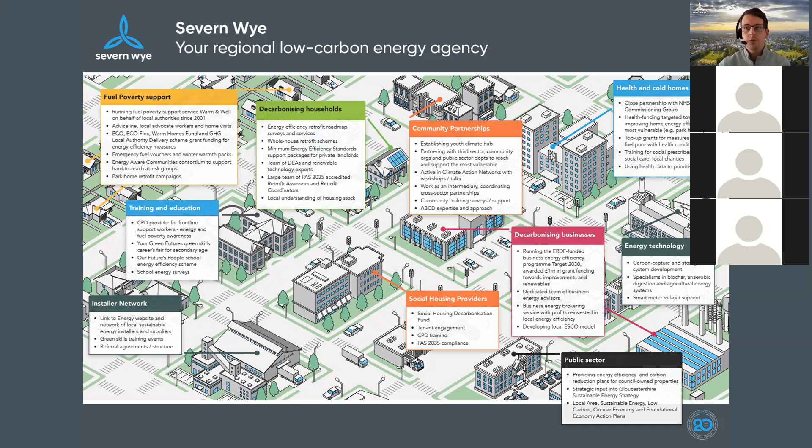Severn Wye as a charity provides support in quite a few different ways. Our main area is fuel poverty support, so that's helping people on low income or who receive benefits. We also do training and education, and we've got our own installer network for people looking for installers to do work. A lot of work on decarbonising households, community partnerships especially in Wales, and we've got a target for 2020-2030 decarbonising businesses as well. We also work with social housing providers on schemes to help with heating and insulation, and a lot of our focus is on making homes warmer for everyone.

That's what our Warm and Well advice line is for, which is a project within Severn Wye itself. It's funded by the local authorities in Gloucestershire, as well as Gloucestershire's Clinical Commissioning Group, to provide energy efficiency advice to residents in the area.

So what I'll be covering is why buildings matter on the journey to carbon neutral, a brief introduction to retrofit and how that works for a property, a little bit on low carbon heating and renewables, three case studies for yourselves, and we'll let you know about how you can fund improvements as well as other services we've got to offer.

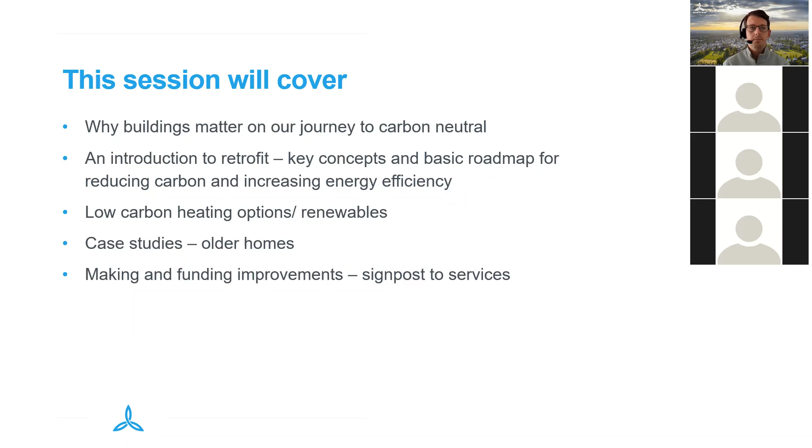So this is a little quote from the Committee on Climate Change: we cannot meet our climate objectives without a major improvement in UK housing. You might have seen in the news over the past month or so, they looked at flats in the London area, and you might have seen images on TV of mold on the ceilings, water dripping through, that sort of thing. So it's basically improving those properties and making them future proof, because the majority of housing stock is what we'll be living in over the next 50 years or so. It's already been built.

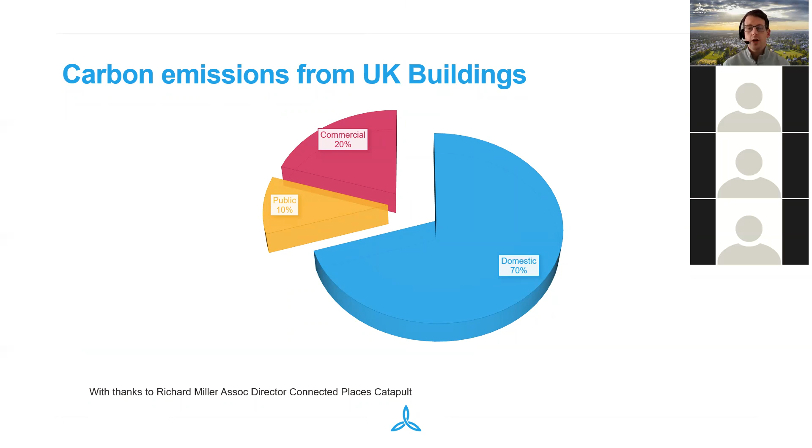Carbon emissions from UK buildings - you can see nearly three-quarters of that is made up of what we call domestic dwellings, with the other 30% from public and commercial, public being things like your libraries and that sort of building. So you can see the importance of why we need to get those carbon emissions down in domestic properties.

Actually, the actual energy use within a property, up to 69%, goes towards heating and hot water, which is why we focus on that area above anything else. And we use Warm and Well as well as government grants to focus on reducing the heat loss of a property to then improve its thermal comfort.

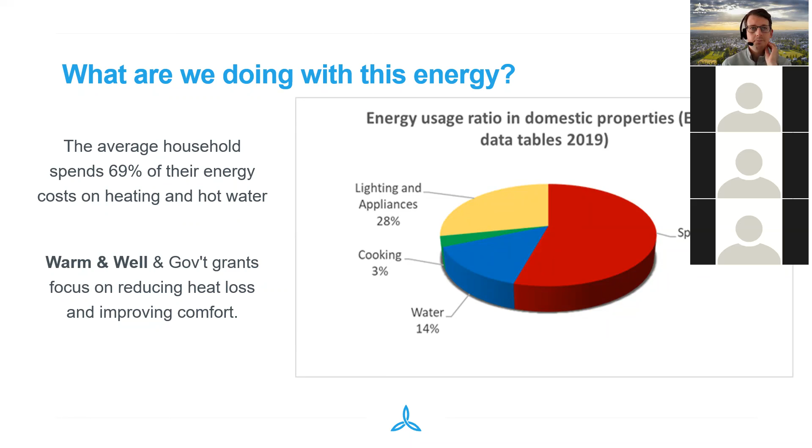There are obviously challenges to this. So you think of your heating source - a lot of rural properties use either LPG or oil to heat their properties, and that's obviously very carbon intensive, a lot of emissions from that. You've got solid walls, whether that's brick or stone, which can be quite difficult to retrofit with insulation at times, but not impossible. Properties with lots of windows, or what we call cold bridging.

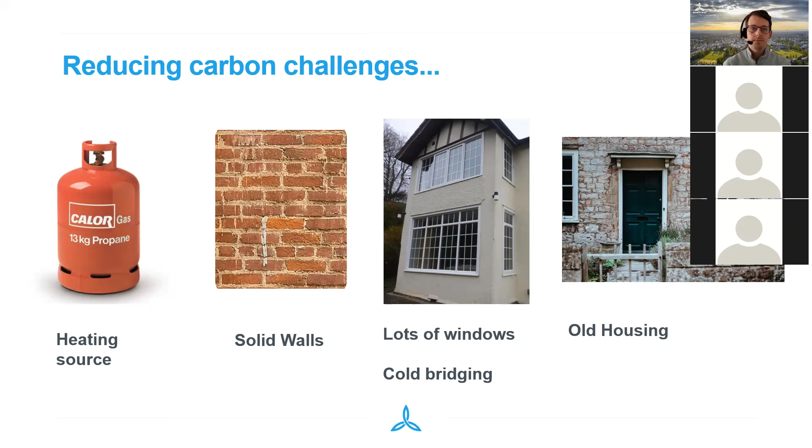So what is retrofit? It's basically a whole house approach to improving a property. Whereas before we looked at just single measures, so you'd just put in cavity wall insulation, or loft insulation, and that was it. It's now looked at as a whole house approach, so you'd look at all of those things in one.

We wouldn't necessarily recommend putting them all in at once because they all come with their own challenges, which is why you do a phased approach. So you could, for example, do external wall insulation with replacing the windows at the same time to meet that external wall insulation, so there's not a cold bridge there. Then after that you could look at doing your loft or other areas, making the property more airtight.

And then that means you've got a lower heat loss for your property. Then you'd look at developing the heating system, either to a renewable system or something more efficient, like a highly efficient gas boiler.

It's a fabric first approach, so that basically means insulate the property first before doing anything else. It's quite highly intense in its risk, so at each stage there's quite a few steps to go through.

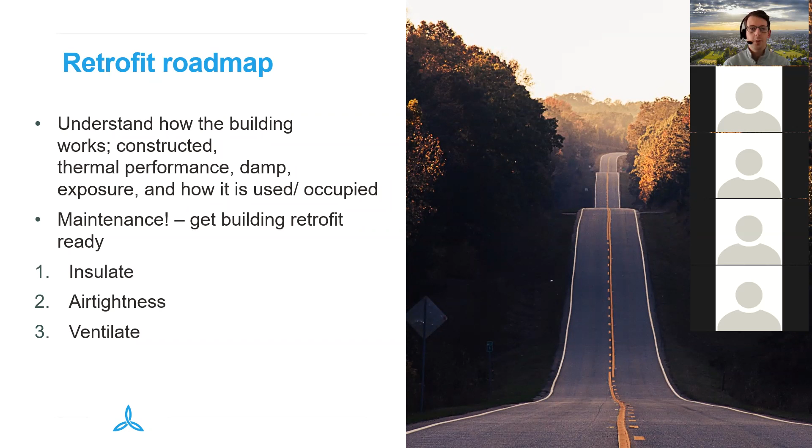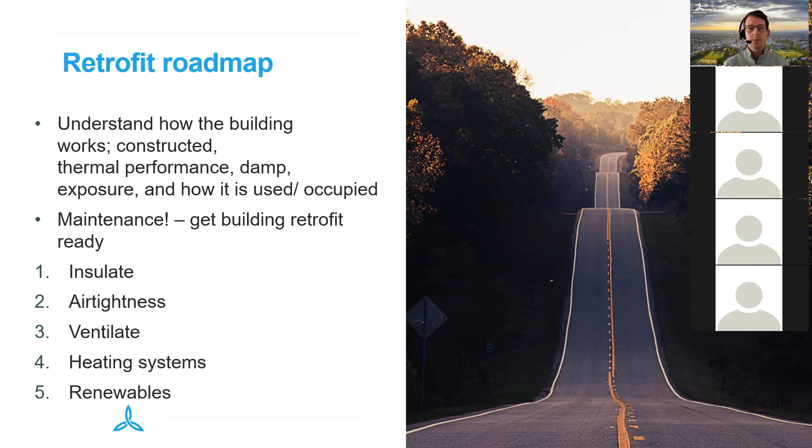So you insulate first, you get the air tightness right, and then you have to ventilate because the property is airtight. Now we need to make sure the ventilation is enough for the property, but we'll go on to more of that in a second. Then, once you've done all those first three, you'd then look at heating systems for the property and then the potential renewable options as well.

So what we say with this is insulation and air tightness is obviously the cheapest, greenest energy is the energy you don't use, which is why there's such an importance on reducing the heat loss first.

In this example, this is a typical semi-detached 3-bed, I believe. You can see that exactly 50% of the property is losing heat through the walls and the roof. You can see that improving both of those measures would help reduce that heat loss from those areas, which are the larger areas of the property.

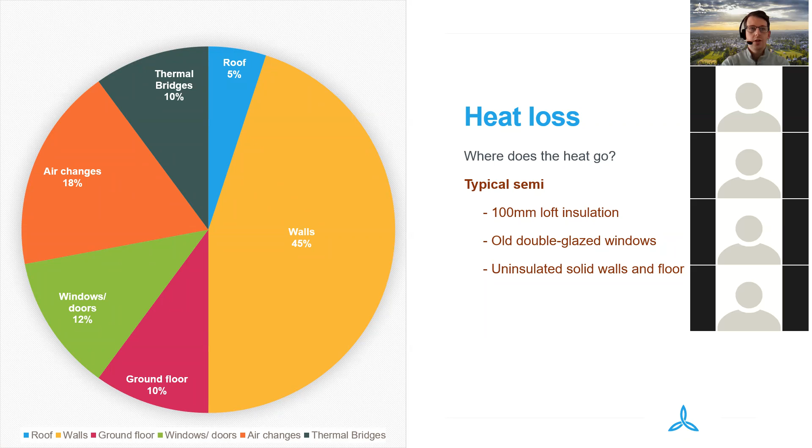Air changes is basically from uncontrolled drafts in this occasion. So once we installed phase 1 retrofit, which would be installing wall insulation, doing a loft top up, and new windows with no attention to any of the drafts or any thermal bridges, you can see that the walls and the roof only make up 19% of that heat loss now. So then you look towards reducing your air changes at the property and reducing those thermal bridges as well.

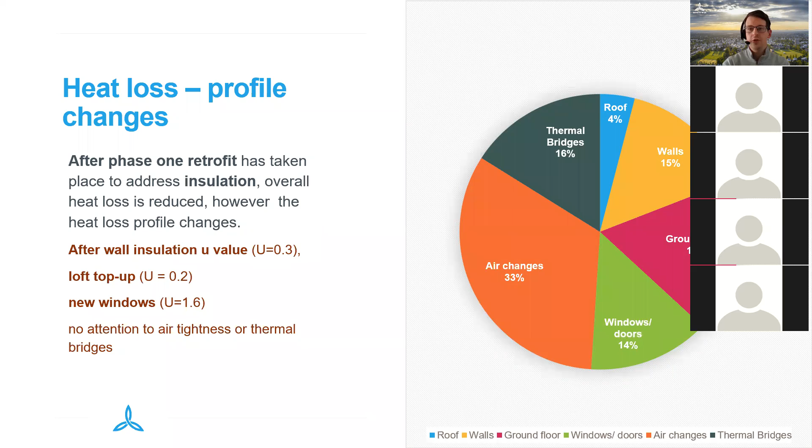I'm not sure, some of you may know these types of installations already, but we'll run through them. So you've got solid walls, you can do them externally, internally, or potentially a mixture of both. That would tend to happen if there's planning constraints. A lot of properties can have changes made to the rear, but can't have those same changes made to the front, for example new double glazing or external wall insulation.

Obviously, you need to consider the heritage of older properties and their solid wall properties as well, whether they're brick or stone, and the thickness of those and the condition as well. Ideally, solid walls would be insulated with a vapor permeable insulation to allow the movement of vapor through there, as would happen in those sort of walls.

Cavity walls would just have cavity wall insulation in. You can do external or internal wall insulation as well if you're worried about water ingress into the cavity and making that insulation become wet and cause issues with mold on the inside.

Floor and underfloor insulation is possible. It's a lot easier to do if it's suspended timber floors, because you can put in a robot these days and spray foam up underneath. Obviously, with concrete floors, you'd need to take up the floor. Basically, the property would need to be empty to insulate those.

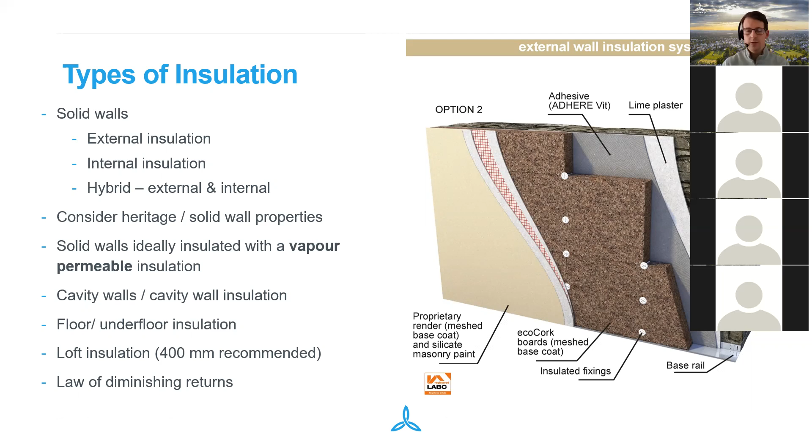So we've got natural vapor permeable insulation - things such as wood fibre, hemp, sheep's wool, cellulose. The benefits of these are that they don't have any effects to your health. There's low embodied carbon, they're not toxic, they can be biodegradable, and they're vapor permeable.

The cons are they tend to be more expensive because they're not necessarily mass produced. Thicker depths are required - so, for example, you might need, say, 500 millimeters of sheep's wool compared to your standard rock wool, where you might need, say, 250. Obviously, that can be determined by an accredited installer.

They tend to be more expensive, thicker depths, and can cause issues in cavities. That relates to wool being blown into cavity spaces - not always will the insulation settle evenly over time, creating a sort of cold spot around the top, and it can also get caught on the ties between the outside and inside skin walls, meaning that it doesn't actually go all the way down, so you'll get cold spots on the inside wall of properties.

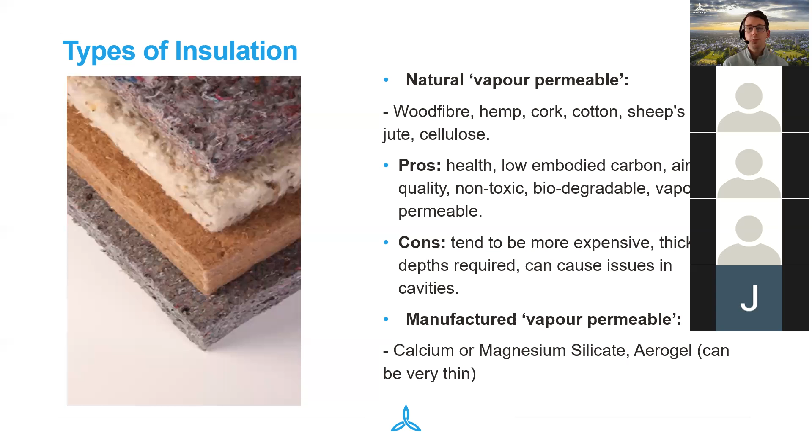You can get your manufactured vapor permeable as well, which is sort of like your standard boards and things. You can also get aerogel, which is very useful for small properties that don't have much space, because you can have a thin layer of that, which acts in insulation properties the equivalent of double the depth.

You might be more familiar with these types of insulation - synthetic, non-vapor permeable ones. These are usually used on, say, newer build properties where the vapor isn't going between the walls inside and out. Probably had Celotex and Kingspan boarding. You can also get polystyrene, recycled plastic, and insulation blankets - your mineral and rock wool, which is in the picture there, which you usually find up in your loft spaces at the minute.

The pros to this is that they are cheaper than natural insulation because they're more mass produced. They do provide high thermal performance with thinner applications as well. But then you've got the cons of actually manufacturing the materials - the embodied carbon would be obviously more in them, and they're non-degradable.

Off-gassing is, if you think of, say, when you have a new carpet installed and the smell of that carpet is basically chemicals being released - that could be the same with, say, foam insulation, with potentially harmful effects to your health coming off that insulation. And you can get possible moisture risk if they're installed into the wrong type of property, or if you just go over the top of an area that's prone to mold and hasn't been rectified before the insulation goes on.

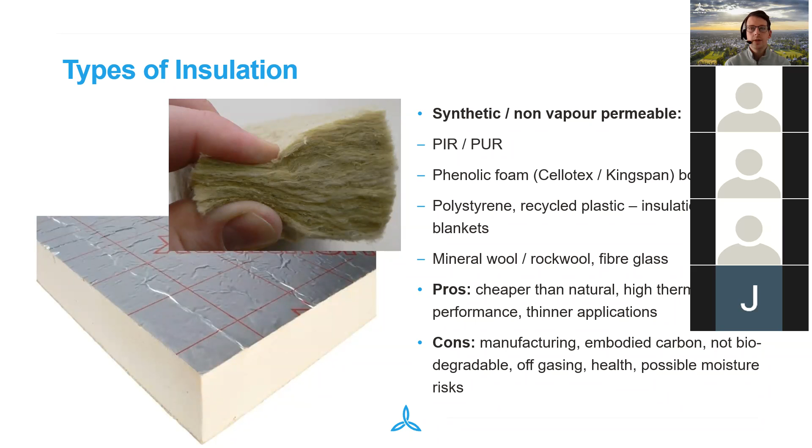So we're looking at air tightness now. Once the insulation has been installed, then the percentage of energy loss through uncontrolled ventilation increases. By uncontrolled ventilation, I mean any sort of gaps around pipe work or around windows or under your doors, that sort of thing. So once the measures are installed, such as tapes, membranes, plasters, then adequate extraction must then be planned and installed next, to ensure that you've got enough ventilation still in the property.

There's a phrase - insulate right, build tight and ventilate right - which is what is being used at the moment for retrofit.

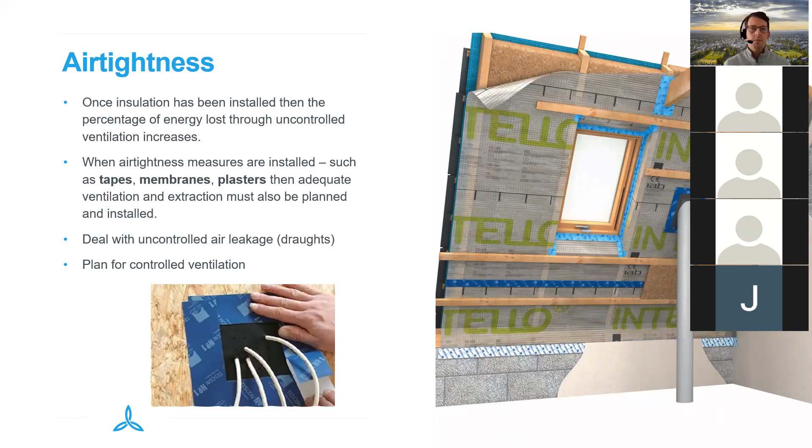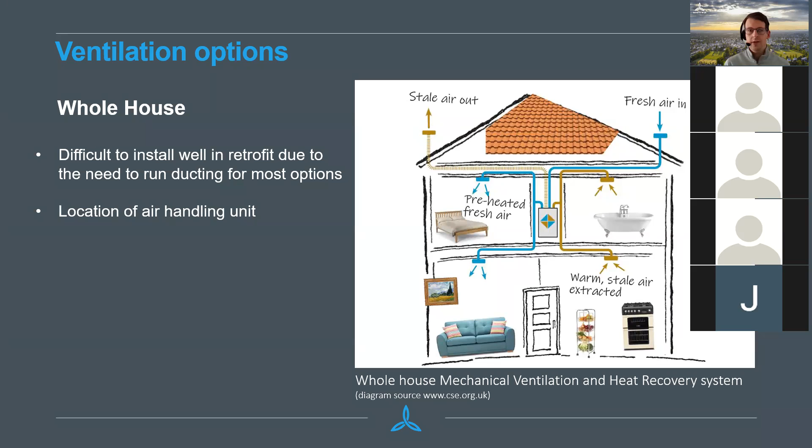The idea being that you remove the stale air and bring fresh air into the rooms where you need it the most. Quite often warm air is extracted from places such as bathrooms and kitchens where the moisture content can get quite high. You may be more familiar with these sort of ventilation options.

So you've got intermittent extraction. That's literally just in your bathroom or kitchen. It might be on a pull cord, or you might have a timer with it. They're great for, obviously, if you're using it there and then, but if they're not running long enough, then you can still get high moisture content in the property.

The next step up to those would be installing an intermittent extractor with a humidity sensor. So these will turn off once the correct humidity has been reached in those rooms. Therefore, you lower the risk of any sort of mold or condensation forming in that area.

We've got purge ventilation, which is literally just opening a window. Trickle vent, which plays an important role, especially if you're in a property that's got windows either end, so make sure they're open, so you've got a cross flow going there. And there is continuous extract with heat recovery, which is more advanced, where we bring in extract air, but also extract the heat from that extracted air for the property as well.

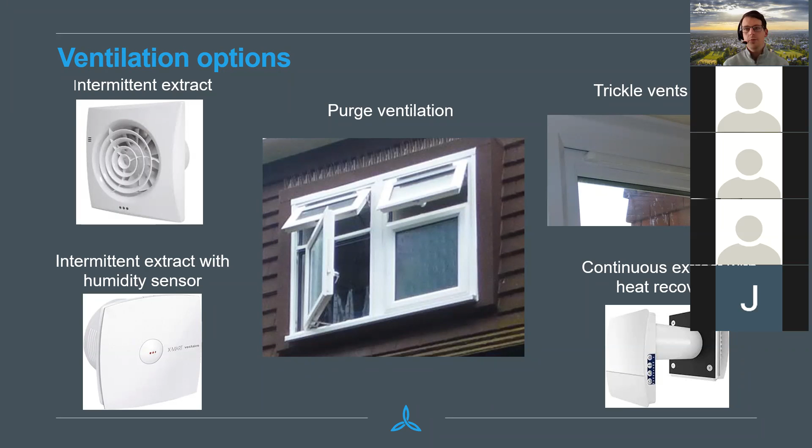So we'll move on to low carbon heating and renewables. We've got your air source heat pumps, ground source heat pumps, biomass, high heat retention storage heaters. They're low carbon just because they run off electric. Obviously, they're not ideal for heating a property necessarily, but that's why they're on there. And we've also got solar thermal and solar photovoltaic as well.

You could obviously with solar thermal, that's usually like evacuated tubes, like you can see on the picture on the right. But you can get panels for these now as well, and they just heat the hot water at the property, but you'd need a hot water tank.

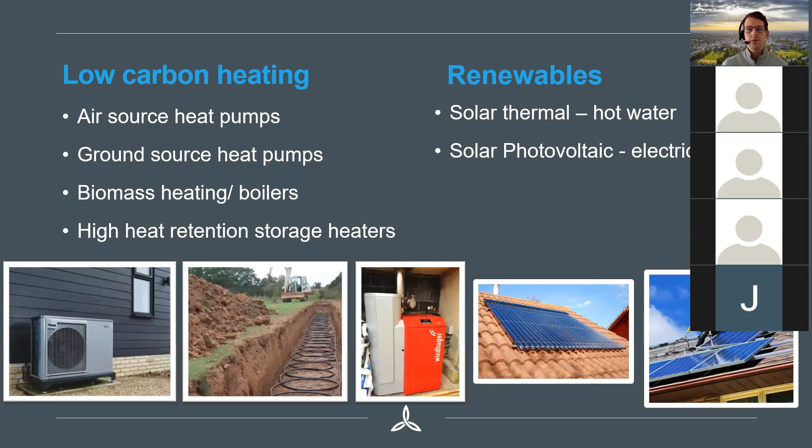And there's several different options available now with solar PV. You can put in diverters to help run a heat pump, or you can put it to sort of like charge your electric car as well as the battery storage options as well.

So air source heat pumps, the way they work is they extract heat from outside air. They can be used to cool properties as well, but a lot of the time we use them for heating. They usually work best at lower temperatures, and for those with underfloor heating, that's usually the best way to do it. You can get air to water or air to air.

So air is basically sucked into the unit, compressed, and then the heat from that is basically transferred into the water that goes around the property. You can get air to air, which just is, as it says, brings air in and then pumps that warm air around properties. You've also got one where you can extract the heat from water as well, if you live next to a river.

You can obviously link them up with solar PV, but it's a good option, but you'd be hoping that there's winter sun as well to have a true effect with that. You can just use a heat pump to do the heating without the hot water.

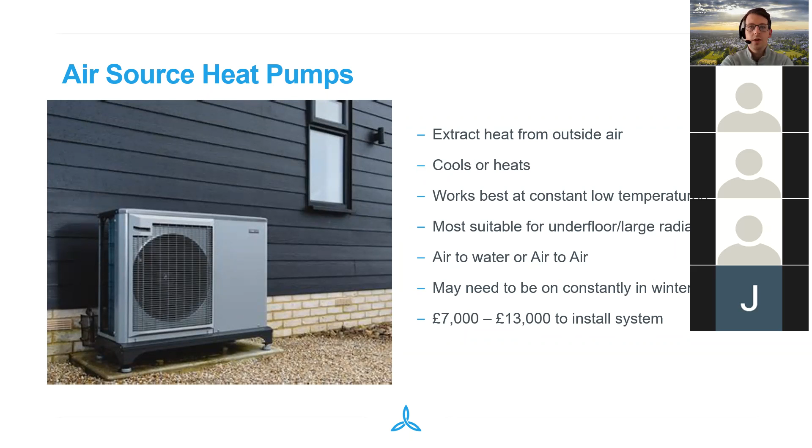There are different options available for hybrid systems now. A lot of the time when we look to retrofit, we would do the heating and the hot water. You'd have quite a big sort of thermal store with the property.

Ground source heat pumps, they can either be done in like the slinky style, which is in the picture, or they can be drilled down vertically from the ground. They basically work in the same way as an air source heat pump in terms of the radiator and the system inside. And they've got to be quite careful - I know we had a session with Kensa that they're not extracting too much heat from the ground. There's got to be some heat being replaced back in once that heat's lost, but they'll know better on that for you.

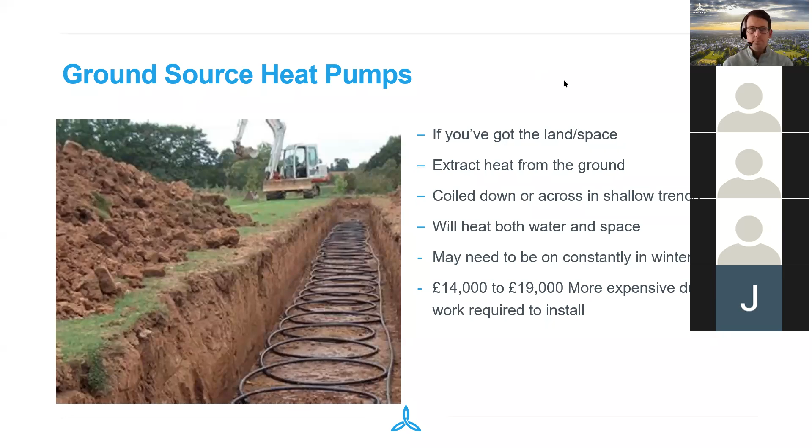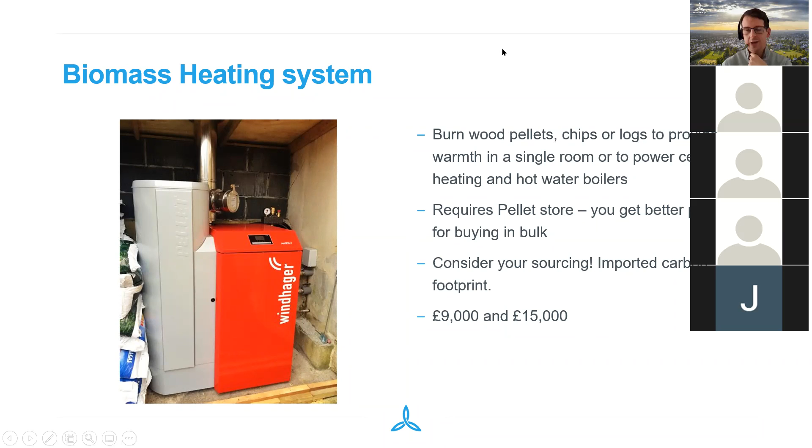Biomass heating is also a renewable option. The only thing you've got to think of is that you need space for the boiler as well as a store for the wood. Consider your sourcing too - try to get it from a renewable source, but as close as possible. You don't necessarily want to be importing it from, say, Scandinavia, because your carbon footprint's going to be quite big still.

So we've got three historic buildings classed as hard to treat properties. This one's a traditional stone cottage in Painswick, which had a sloping ceiling insulation completed - basically meaning they've got a vaulted ceiling with no loft space as such. They had internal wall insulation installed and had their boiler replaced along with controls. It saved them just over 2,000 annually and reduced their carbon footprint by 59%, so quite a good saving for them.

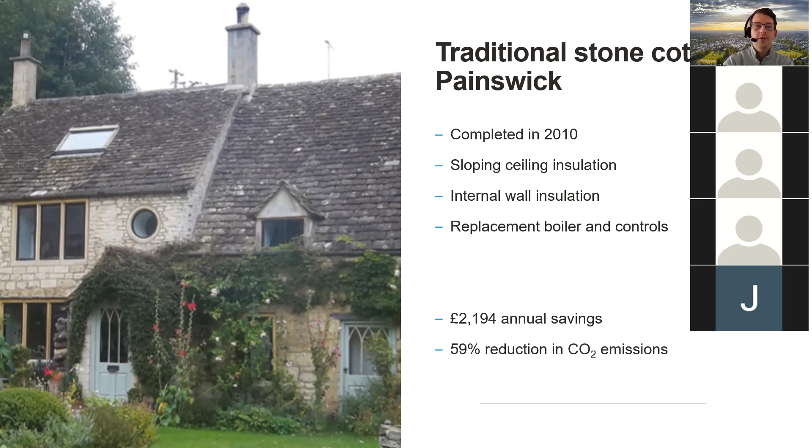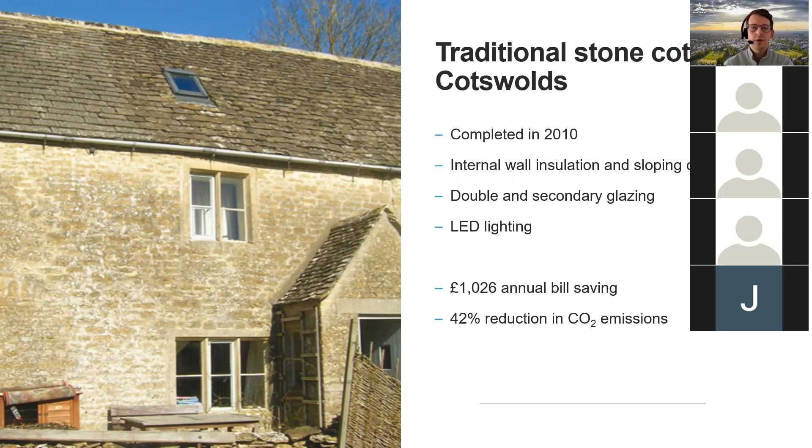Traditional stone cottage in the Cotswolds, again had internal and sloping ceiling insulation, also had a mixture of double and secondary glazing and LED lighting, which again achieved a 42% reduction in CO2 savings.

The final one is an end terrace stone house, which had quite a few measures - loft insulation top up, both types of solid wall insulation, floor insulation, triple glazing, replacement boiler, and solar hot water. In this case they had to have internal wall insulation on the front and side of the property due to planning, and external wall insulation on the rear. It was important that the internal wall insulation slightly overlapped onto the external wall side to prevent a cold bridge occurring in the corner. Again, over 50% reduction in CO2.

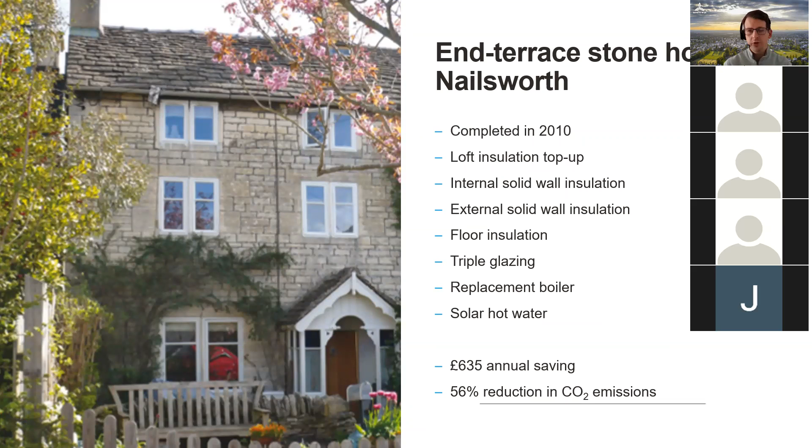So how do you go about funding and arranging this? Basically, Warm and Well can access funding for low-income households through local authority delivery schemes. We're waiting for what's called ECO4 to start in April 2022, which we're hoping can offer solid wall and ventilation funding. All new schemes now focus on whole house solutions rather than just installing one measure. We always encourage people to call and run through their situation, because you never know, and we've got quite a lot of different experience in the team as well.

Wider funding outside of that would be the Clean Heat Fund, which you might have heard of - that's £5,000 towards heating, especially air source heat pumps, and that's available from April 2022.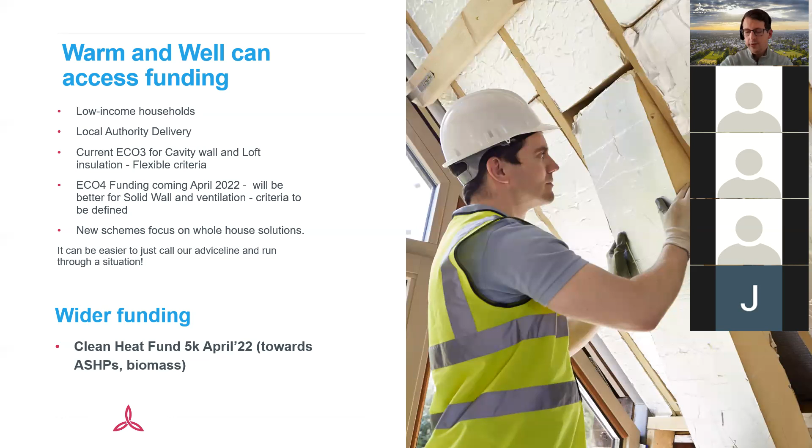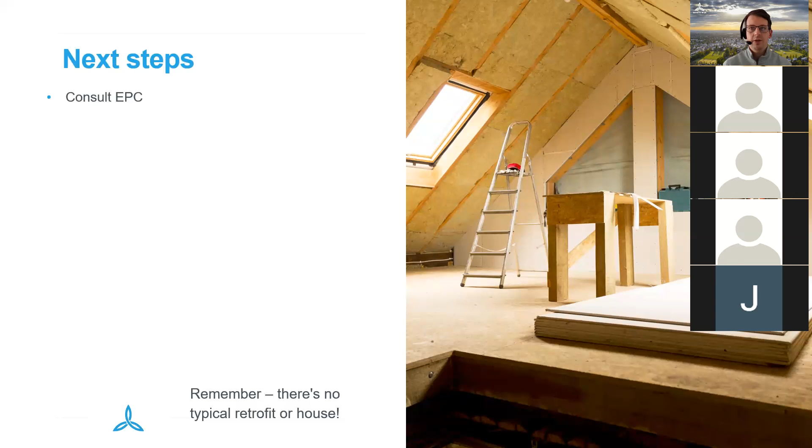So potential next steps for yourselves - if you've got an Energy Performance Certificate, or EPC for short, it can be a good starting guide to see what insulation and heating your property already has, and it will have recommendations on how to improve its rating. I'd say don't treat them as gospel necessarily, because there are still a few EPCs out there that aren't correct, but if you're ever in doubt we can always come out and check for you, or just chat through the situation.

Look to do retrofit surveys, possibly create your own plans, find a retrofit assessor or coordinator, and they'll be able to provide the best advice on moving forward for your particular property.

Consider your budget and approach, whether you want to do the whole thing at once or phase it across a period - it can be years for that.

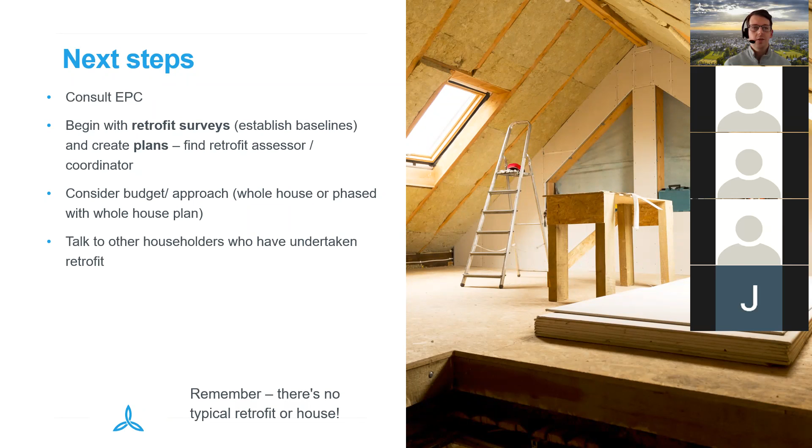Talk to others who might have undertaken retrofit, do your research, attend further talks, and possibly visit the Trustmark site for registered installers as well.

It's also important to remember there's no such thing as a typical house, even when it comes to retrofitting. I do a lot of surveys and different things crop up each day. No house is the same, even if it's in a terrace - each property will be slightly different.

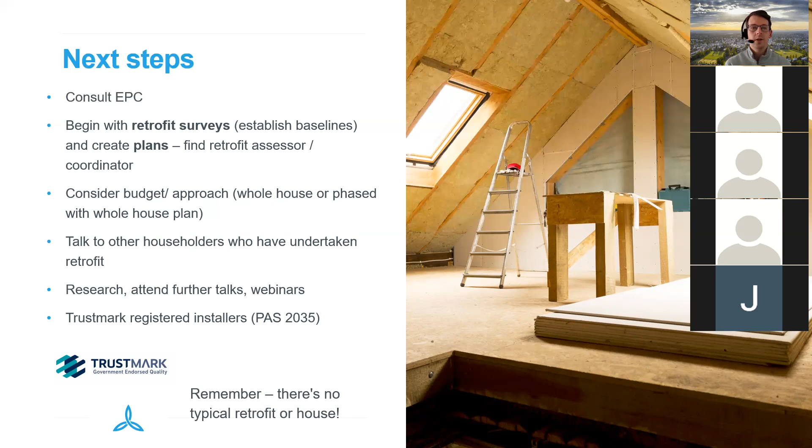You could obviously look at bulk buying goods if you're doing it as a sort of cooperative. Become an energy agent, or just talk about retrofit to friends and neighbours and see what experience they've had.

What we can do to help is offer advice over the phone. We do provide a range of energy surveys as well. I think you might be getting a copy - I'll speak to Kate about the links and access for home energy efficiency improvements as well.

It's just a few top 10 tips. You might have seen quite a few of these already, just about turning your thermostat down, programming your heating.

Checking your fuel tariff, which is quite a hot topic at the minute with everything going up. It's looking like everyone's probably going to have to stay put on their variable tariff until April time, when it would be the time to look at changing, hopefully with some fixed rates.